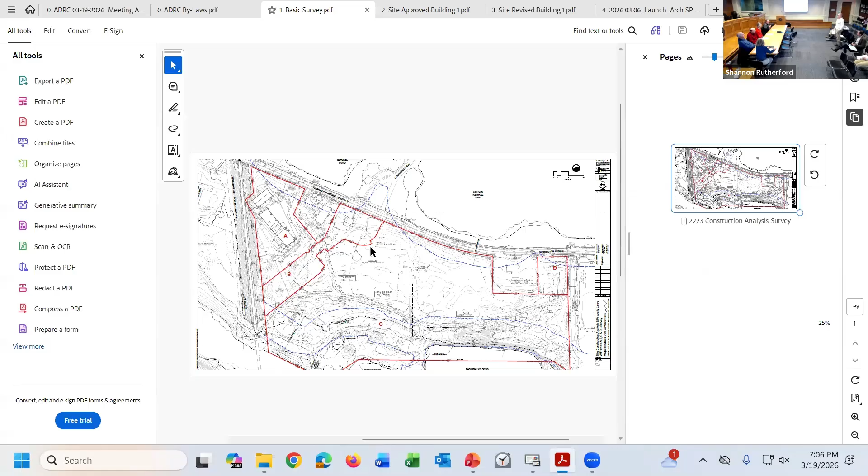So we have the Midpoint Development District informal review, the launch at Farmington. You guys want to jump in and tell us what's going on and where it's at? I would imagine it's changed a little bit from the last time — a little bit, different people.

I'm Charlie Code. I just want to thank everyone for — you guys, if you want to come up to the table, sit at the table. So this is very informal compared to TPZ. You're going to have to — I grabbed a few chairs. Tim's really loud on this thing, so just be careful when he speaks.

Just want to thank everybody for coming and meeting with us tonight. As you're probably aware, my father, Abe Code, and Jeff Scott passed away before they could finish this project that they started back in 2018. My brother and I partnered with good people of Conover and East Point to finally move this forward and get it done. That being said, I'll turn it over to them for the details, to Newt, Bill, and Sal.

Why don't we just do introductions? That's what I was going to say. You guys may or may not remember, I'm Phil Doyle, land planner and landscape architect. We prepared the site plans for this, and we presented to you guys on a number of occasions.

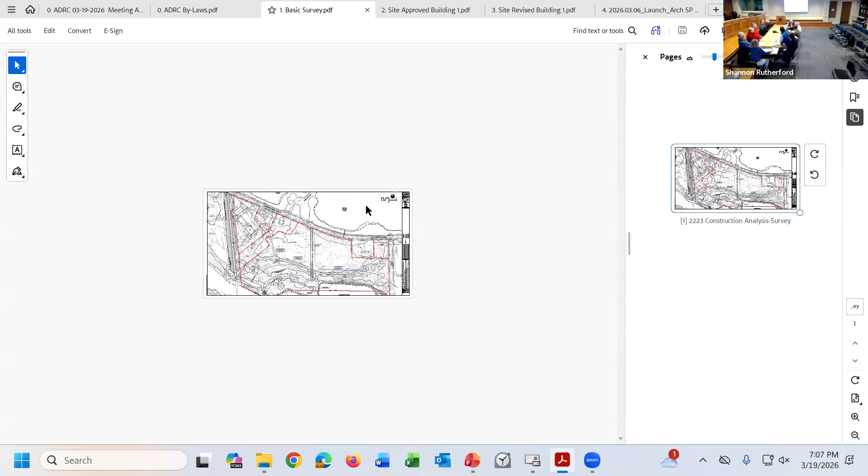And we've got Charlie, will you run down the rest? Sure, Newton Brainerd, I'm Vice President of Development for Simon Conover Corporation, and we're working with the Codes to try to move this forward. I'm Sal Talamo, I'm the principal at Sullivan Architectural Group, and I'm looking to implement the approved design already. I'm Eric Boyce, I'm an associate at Simon Conover with the acquisition and development team.

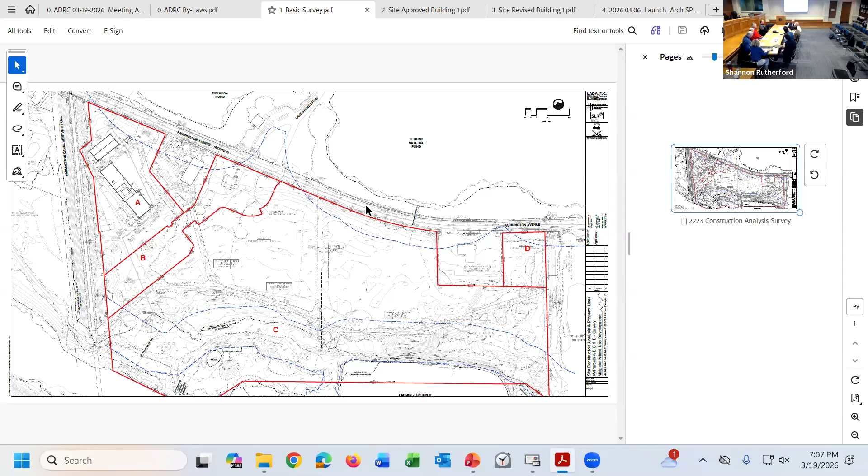And where we are, you have seen the email, I think, that Shannon had sent out. We've gone through the approval process. We have the site plan approval, we got our special permit, and we got our master plan approval.

There was always a likelihood that one side or the other was going to move forward, and Shannon put up a plan that I had sent over to her. That plan represents the various parcels within the development. Jeff Scott was the original owner of the property, and you guys all remember Jeff.

He also passed away in an accident. So this was one of the interesting projects where we had two great leaders, and both of them unexpectedly passed away. Jeff had most likely been the one to start first because he had that internal love for those existing buildings on the property.

He had put aside a substantial amount of money and had a vision. He knew what he was going to do, and he was about to start on the trail renovation or extension when he passed away. Because the Codes portion was bigger, dealing with a number of buildings and a lot more earthwork, they were taking their time putting the financing and contracting together on that. But then the deaths threw everything into confusion.

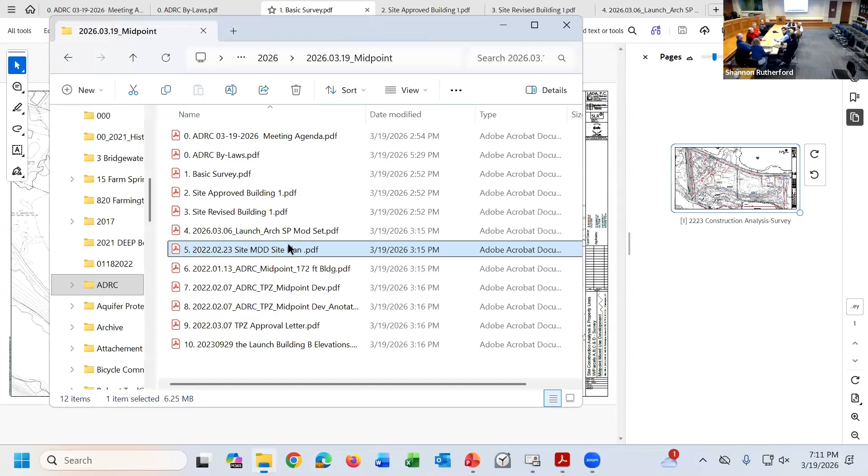And we could point out where building number 1 is. Building number 1 is immediately adjacent to the main driveway that would come in, the boulevard that would come in for the residential development. So it's very prominent, and it's got a parking lot in front, a double-loaded parking lot. The parking lot in front also serviced the in-building parking spaces. You might remember that on the lower floor, we had two boxes that each would hold 6 parking spaces.

All right, there's microphones under the table, at the center of the table, so just watch your feet. So that's what you're going to hear. I might have just done that. Sorry, booby trapped - that was not me.

Well, when we were looking at this, Sal had made a suggestion that maybe what we should do is think about leaving that building in its general location, but taking those parking spaces and creating our retail space there, putting more parking immediately in front of the building. That might be a nice location because it would be facing the street. We could attract people who might be bypassing on Farmington Avenue, and our tenants who might be going out or coming in at different points might find it a convenient place for some retail. Because it's visible to the street, it might be a successful opportunity to put a small amount of retail into the development.

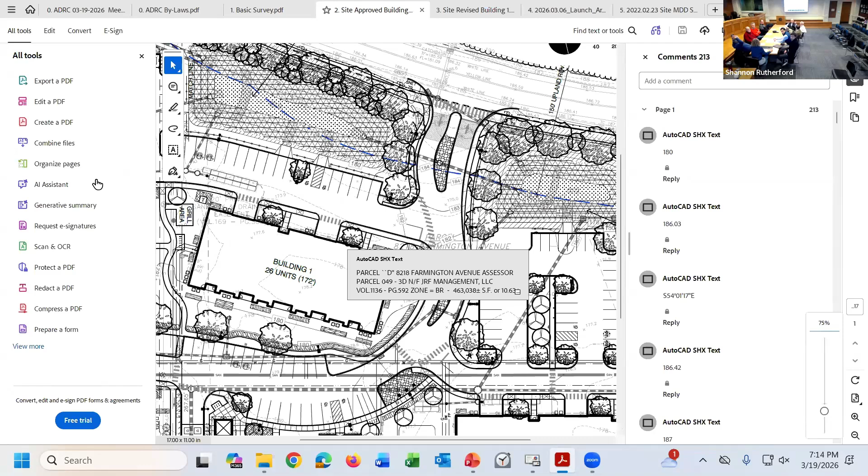Do you have the plans, a little bit bigger, that I had sent over? This was the approved planting plan, I just haven't colored it up. I took that and gave it to Shannon - it shows where the 2 driveway entrances to building number 1 would be, and how close it is to the driveway.

One of the thoughts that I think Sal had was making sure that we had a space on that lower floor that was adjacent to the underground parking or the in-building parking, making sure that we retained that as a unit.

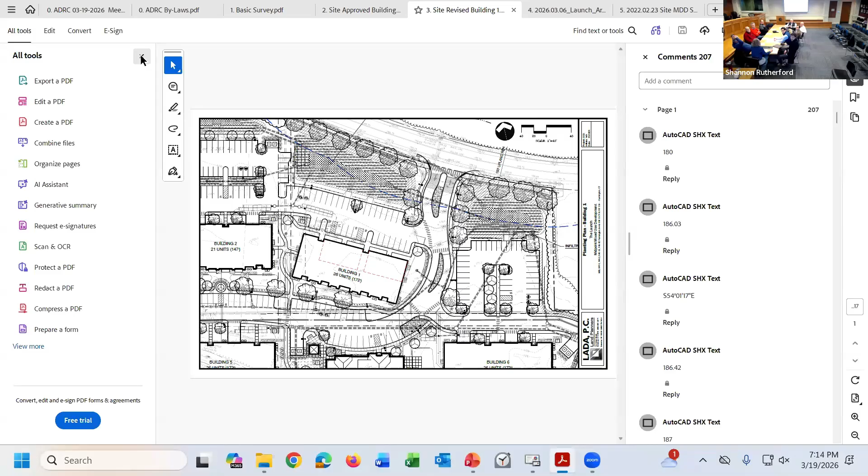So we flipped this building over. The left-hand side had the garage closest to the edge of the building, the internal section of the site. If you go to the new plan, Shannon, we flipped it over, and I've colored in here with a red line where those retail sections would be, and that allows us a corner retail unit.

So that's the change we're looking at making in terms of overall scope. And the details of the building, you guys had presented a recommendation to the TPZ, and I think comments 1 through 5 related to the buildings on Jeff Scott's piece. Comments 6, 7, and 8 were comments that related to the residential, and we need to move forward. So we need to engage everybody and try to get this in place so that we can go back to TPZ and hopefully do a relatively simple site plan amendment so that we can get going with construction.

So in building 1, there's no parking inside anymore. There'll be no parking in that building, and thank God Abe was such a pain in my butt, in that he would push and push and push you guys. I need parking, I need parking. So we have more than what the code requires.

And originally, overall, we had for this development, we had 333 spaces. And the way the regs work, I have to calculate parking for the residential plus parking for commercial, and I'm going to need to add 5 spaces. So we're, thank God, tagging one here at the end, one there at the end, type of thing.

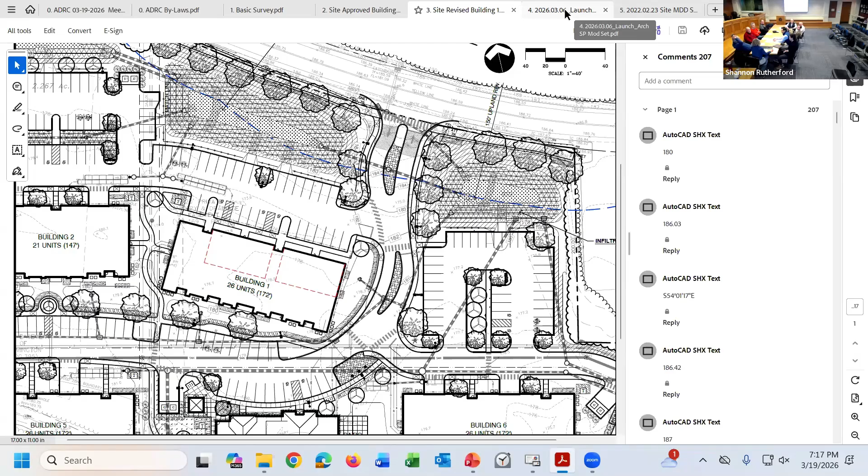So can I ask a question as to what is on the ground floor, what I'll call the rear of the building? Let Sal, do you want the full setup? Yeah, you want this up? Sure.

So the intent and what we're trying to do is to maintain the general integrity of the project and minimize the changes. So we initially took the exact building, shown on the bottom, and we flipped it along its short axis to get that unit that's on the right over to the left. And all we're doing is taking the two 6-bay garages and turning them into retail. Other than that, nothing else is changing.

So those are ground level units. Which they always were.

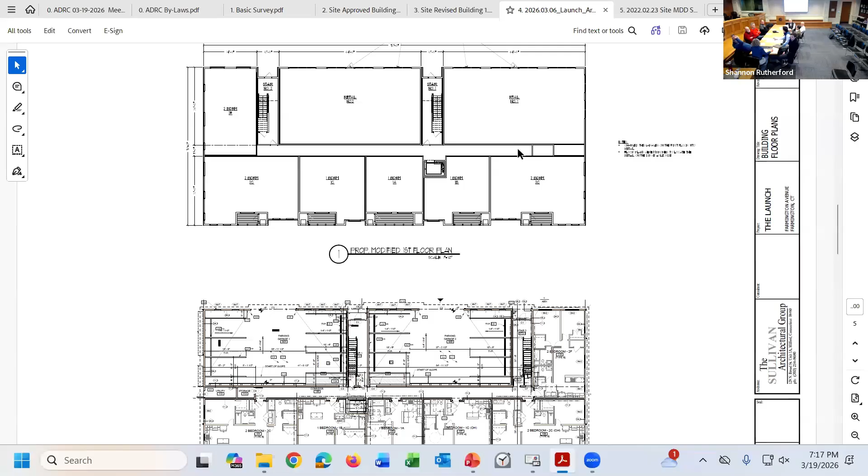And so what does that look like in elevation? If you go to the next slide, the elevations on the bottom are what was approved. The elevations on the top are what we're pursuing. And all we're doing is taking away those garage doors and the smaller fenestration. We're adding larger, more retail fenestration. So as you drive in, now the retail is on the left, and the unit is shown on the right.

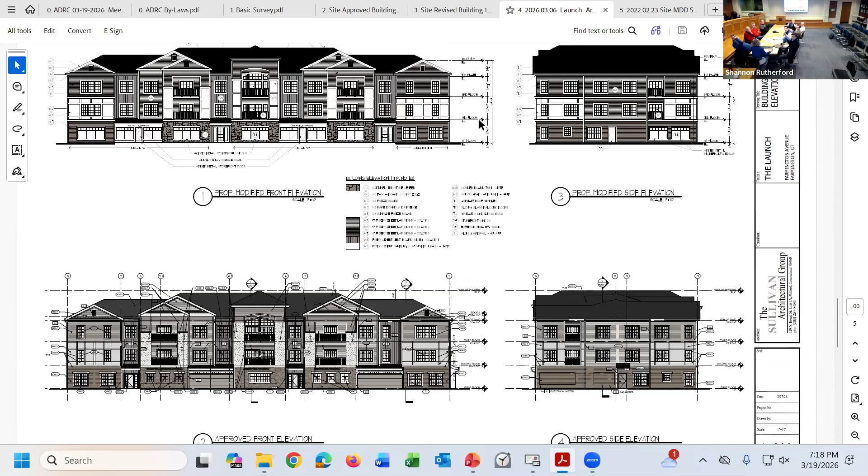And if you go to the next slide, we'll show what we're looking at. So the building looks exactly like what was approved, except it's got ground level retail, which was a subtle refinement to meet the retail requirement the property needs.

Is the retail area percentage of the development anywhere defined as to what makes it? I mean, you know what I'm getting at? There was not, just so that there's something there. The regulation does not specify the percent of retail. So it was part of an overall master plan, and the language of the regulation specifically requires a live, work, play component.

It will be really up to, certainly with input from you folks, which is why we're starting here, but up to the commission whether or not they feel that phasing this in a fashion that is clearly more heavily residential than commercial is appropriate and in keeping with the vision of the regulation and the POCD.

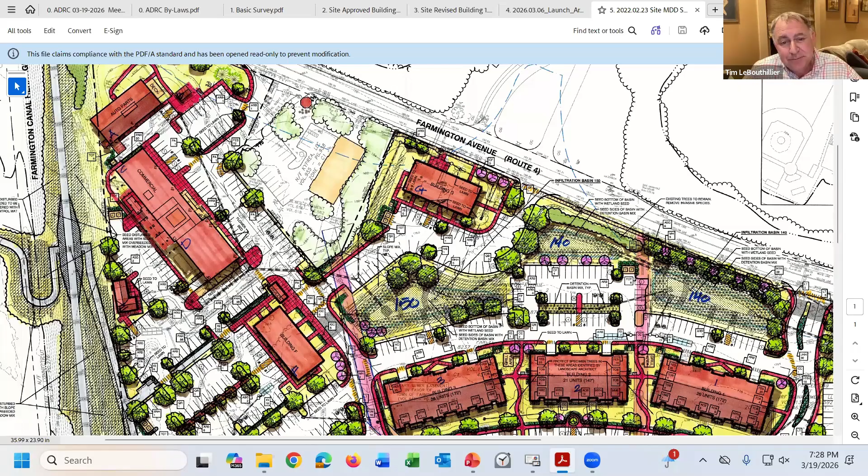What the proposal will be here when we go back to zoning is that this group is going to be building all of the trail connection, and that's possible because as part of the contracts, there are bonding, private bonding and the like set up so you can get reimbursed for doing that work. So all of that trail will get reimbursed and will be constructed.

I think Charlie, or your brother, has had conversations. My brother Maurice has been in conversation with Enam from Superheroes, and according to Enam, they're getting prices on the development, and he was in agreement of taking down the houses in the front. He was all for it, all for moving forward, verbally. In our talks with him, he's been asking how far along we are so they can plan to move along. So the conversations my brother has had with Enam have been very positive. That's where he is now.

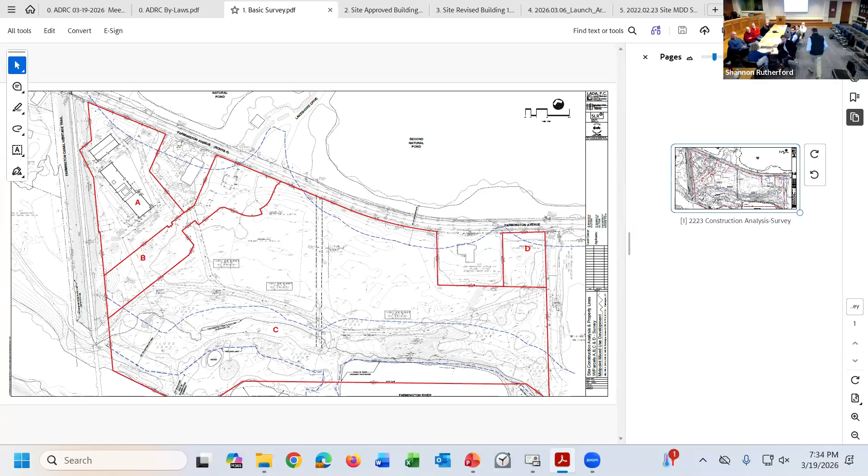I couldn't tell how wide it was compared to, it looks skinnier on that other plan. Yeah, that looks like it lies on your line, if I had to guess. The property line is very close. Oh, it does widen out there, I see it now. This follows the curb line, and when I come back... yeah, I forgot it widened out. We had all sorts of fun with those easement documents. So yeah, it's pretty much like 2 feet off the edge of curb. And then it's just this parking, because the basin is on the code piece, and it cuts through, so it's like a barbell, kind of.

The survey, we're not looking at the whole property, so it's a little off. No, understood, I see now that on the survey it widened out there.

Really, the challenge we at Simon Connor Company have uncovered as we've gotten in to try to understand this is you've gone from two partners and friends trying to push this together and ready to go, to somewhat unrelated entities. So when we come in and look at the residential development, you really can't move forward unless you can bifurcate them, because a bank is never going to lend you money if you can be held up for whatever reason by the neighbor. So we want it all to happen, but in my mind, the only way their project happens is if our project happens, because once we invest $40 or $50 million, one of two things will happen.

They either figure out a way to do what they're going to do, or the value has gone up and they'll sell, and the next person will come in and do it. I think practically that's what's going to happen, and without that, I think it all sits. So that's the puzzle we're trying to put together. We're not trying to push this through and have no retail, but I firmly believe that by the residential going, it unlocks the entire thing, because Abe and Jeff are no longer able to do it together.

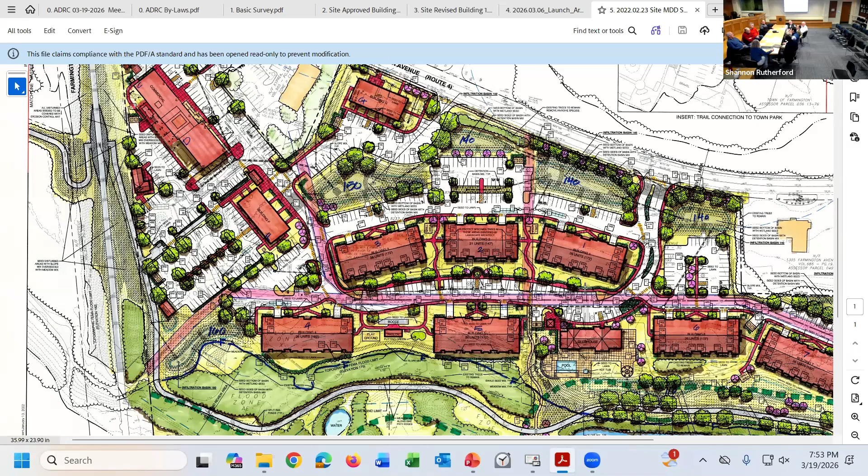We're kind of saying it'll die, can't really be mixed use. We can fill the spaces for mixed use, but token. Well, right, unless we have the bigger vision. And that's the impediment, I understand why we're there. That's why I'm kind of a believer in the bigger thing, because I think everybody in town who's approved this wants the total development, as do we. But it's an impossibility to do it in concert with the neighbor who we just don't know anything about.

It doesn't work. Have you tried to acquire that parcel and do the entire development? Yeah, we've had multiple conversations. They're very nice, they just sit back and wait. I've said in multiple meetings, the best thing that can happen to you guys is if we build this thing. So I think they get that, and they'll be helpful with easements and stuff like that. But other than that, I just don't know - it's not what they do for a living, particularly.

Slow on the draw, yeah. But I remember Abe talking to me, because Jeff passed away first, and then Abe said, 'Should I buy this?' And my comment was, yes, you'd rather control it, and then if you want to sell it or sell part of it, you could. But he then got sick, and that never happened.

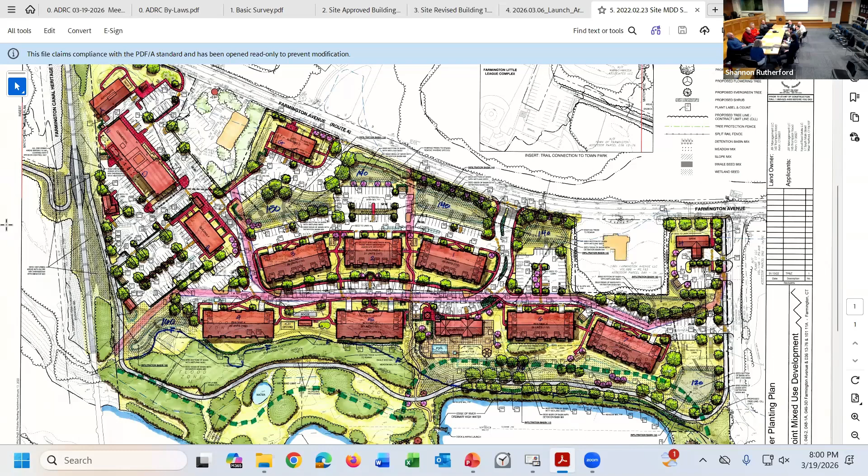I had one more thing I wanted to present, just to get a sense of it. In developing these buildings, there's two things that haven't been considered. I understand there's a certain integrity that the approval has, but with the hipped roofs, there's no real way to vent it properly.

So I have an idea for that I'd like to share, as well as the mechanical systems haven't been considered. I also have a rendering that shows what adding a specific mechanical system that might have exterior louvers on them. I have it on a thumb drive if we want to share it, but this is the rendering I was talking about, where I would add these end gables here on the ends of each building.

So I can get a vent to vent the roof properly. The building still steps down, so this ridge is not higher than this ridge. It's just a means of getting the proper airflow. Secondly, I'm adding these louvers that would be the same color as the siding it sits in, to get the proper mechanical equipment that wants to support this lifestyle.

You want to put it up so Tim could see it? Shannon, could you? I have a thumb drive. I can't, unfortunately - it's an IT issue, I might lose all my fingers, so I can't put a thumb drive on that, Tim. Main computer. All right, describe again - are we talking about another vent?